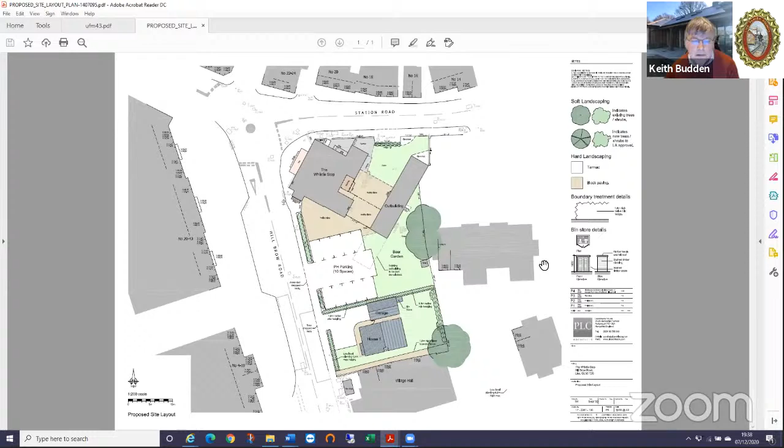Okay, so this is the proposal, which is to build a new house with an external garage on the Village Hall side of the existing car park. As I think everyone present knows, but just in case you don't, originally we had an issue with this because the application site was right up to the boundary with the Village Hall, which would have given us an issue with the fire escape from the rear of the Village Hall.

I would like to commend the applicants for responding very quickly to our request on that. They've moved the site over slightly to allow a path, which Liz is indicating now, for the fire exit to still go down. Now, obviously that will mean sacrificing the border that's there at the moment, because people can't currently walk down that bit of land. But at least it means that we will be able to maintain the fire exit. As I said, I'd like to thank the developers for responding very quickly on that request.

The only other comment I'd like to make at this stage is I do have a concern about the fact that the entrance to the driveway of the proposed property comes out within the boundary of the existing bus stop markings on the road on Hill Brow Road. I don't believe that's a significant issue, but it is an issue, particularly around the time when, not the public buses since they're now only once every two hours, but the buses that pick up and drop off from school from Bohunt, I think might be an issue.

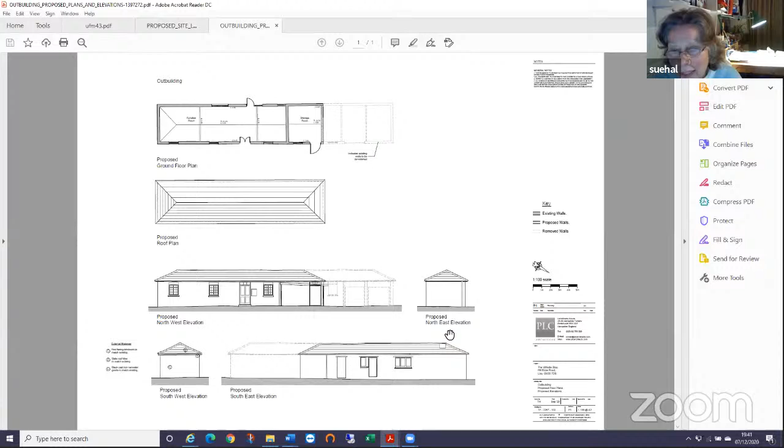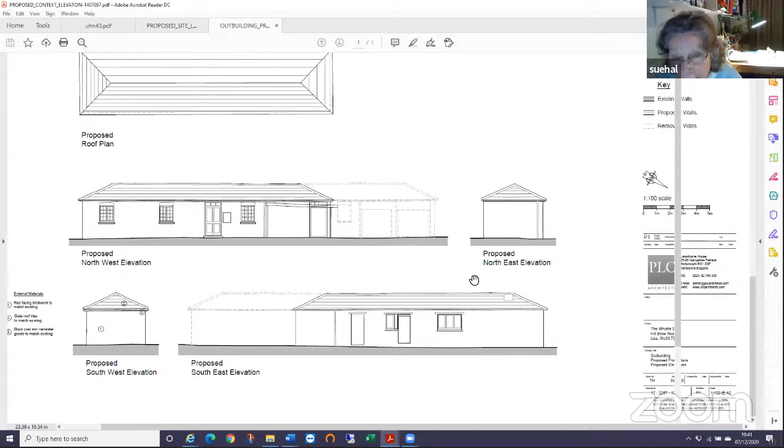Our village design statement, the local development plan policy 9, and the National Parks Policy SD5 all call for high quality design which respects and enhances the character and local distinctiveness of the conservation area and does not harm it. So I disagree with the applicant who claims that his proposal does that.

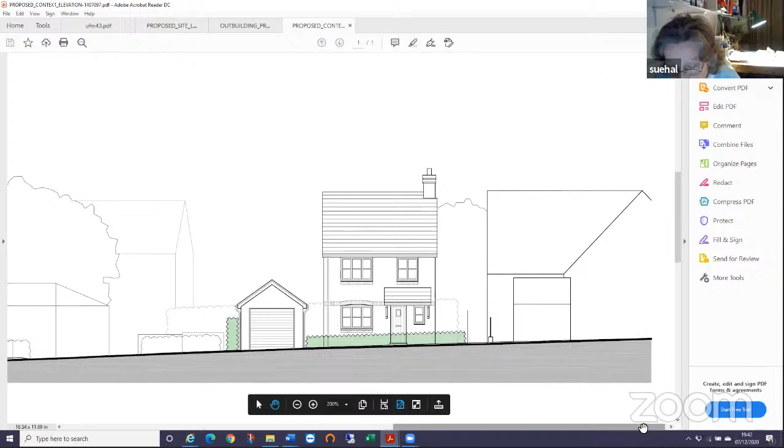The gable and windows on the side of the village hall facing the car park are a particularly characterful element of the village hall, and they will be largely hidden by this new house. It seems to me that it might also result in a considerable loss of light for the village hall.

A distinctive feature of existing small homes within the conservation area are attractive gabled porches and detailed gables to the roofline. That's completely absent from this proposal.

Materials will be critical, and I'm pleased that a slate roof is proposed, but I'm less sure about the red brick finish. Again, most of the existing smaller homes in the conservation area and the pub itself are rendered.

I have noted the revision you pointed out about the fire exit down the side of the village hall. However, I still have some misgivings given that the exit runs down alongside the village hall by the kitchen wall and window, which seems to me to be a likely starting point for a fire. I wonder whether this route has had the approval of the fire safety officer and whether there is a viable assembly point.

Parking, I really believe, is a critical issue. I'm not convinced that the retaining 10 spaces will be sufficient for the pub, not least because this pub is particularly favoured by builders and workmen at the end of their working day, and is a popular meeting spot with these people who tend to have rather large white vans which overspill standard car parking sizes.

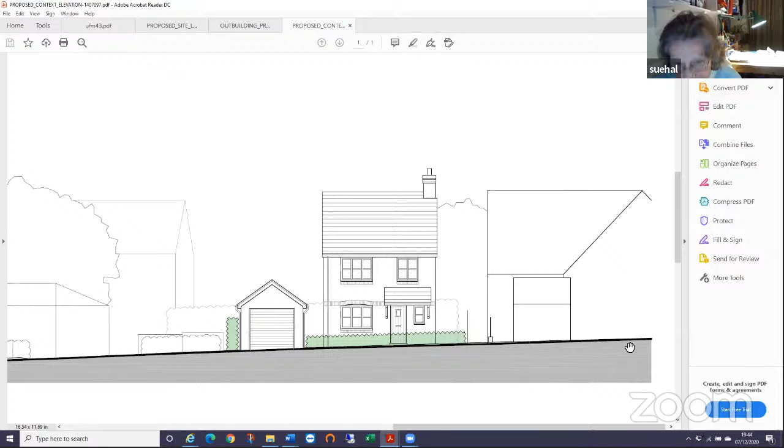I note from the deputations we've received from the applicant that he does seem to accept there may be a need for more parking spaces. The transport study he produced has identified in blue on the plan local streets without parking restrictions. Many of these identified streets serve terraced houses which already struggle to provide sufficient on-street parking to meet the needs of their own residents.

An alternative suggestion made by the applicant is the car park behind Tesco's. The applicant may not be aware that this is not a publicly operated car park. It is in fact a private car park owned and managed for the 45 flats and 6 shops in the block. It could be closed at any time.

The LNDP policy 15 makes this point very clearly and states that additional car parking to serve the village centre should be encouraged. You mentioned yourself the access to the property across the bus stop, where parking is not permitted.

On-site parking is proposed as a garage with a further parking space in front of the house. This sort of configuration is not supported by the emerging national park parking strategy, and our village design statement states that all future developments should have reasonable access to off-road parking.

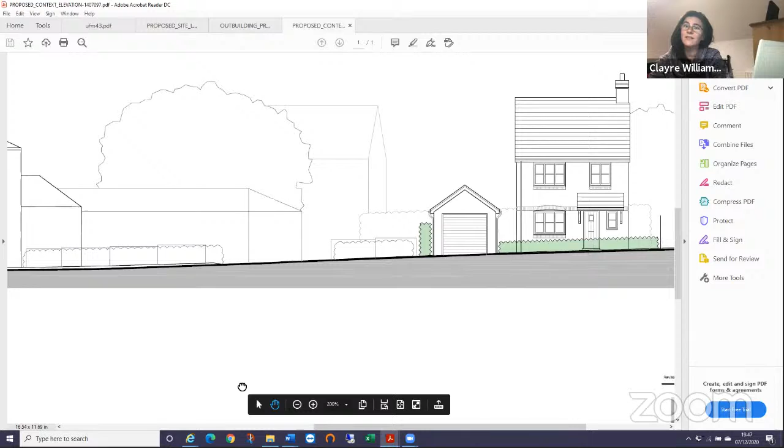The only thing I have to add is that the noise impact survey was done in October this year, which is not a good reflection of how noisy the pub is at night. Yeah, I take your point because of lockdown and curfew and everything else. Yeah, and it is very, very, very noisy.

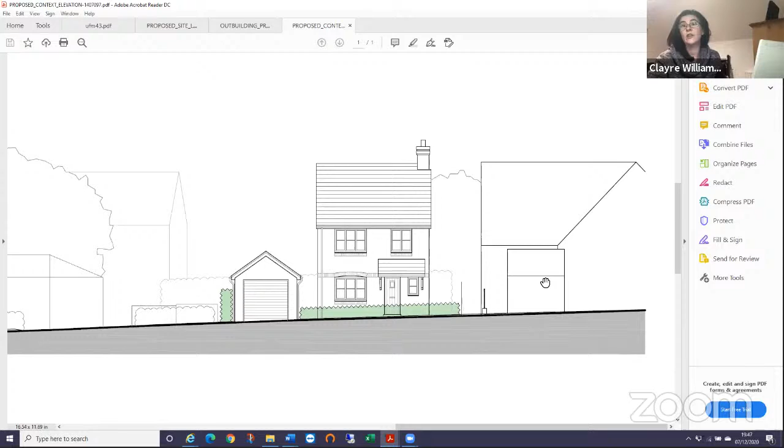Sheila: Well, I've got quite a lot to add to that too. I looked at the parking survey, which was taken up presumably to justify the reduction of car parking spaces, backed up by a totally unrealistic photo of the junction. I've never ever seen it so bare of traffic.

One of the reasons people don't use the pub car park, why it's fairly empty at times, is the difficulty of exiting it, a problem the residents of the new development would face. There have already been several near misses there, one bad accident I know of. It's due to it being a busy roundabout.

Constant traffic from Hill Brow Road, exacerbated when traffic's held up by the delivery lorries, the brewery lorries, and from Station Road, especially after traffic's been held up for up to 10 minutes at the level crossing. There's often a tailback from the hill brow end when the level crossing's down. People park on the double yellow lines. Okay, they shouldn't, but they do, so visibility is reduced.

And I've also got the bus stop. But I notice in the section on highway-related issues with access, they've actually admitted that, quote, there will be short delays for residents seeking to enter or exit, unquote. So it looks as though they've already realised that themselves. Mention of a vehicle crossover, I'm not sure what that is.

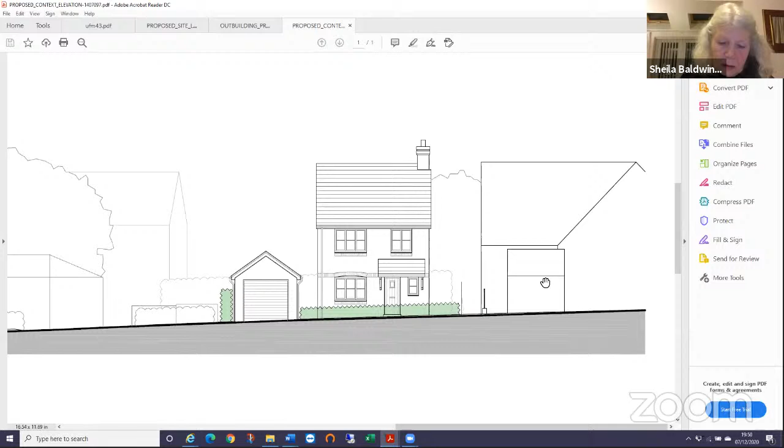And I wasn't sure about the outbuilding because it says one is being partially demolished, but from that drawing Lizzie put up just now, there seems to be quite a substantial outbuilding in the plan, so I'm not sure if that's part of the...

Just to clarify on that, Sheila, it's being shortened. Where Lizzie's got the mouse now, the hatched part there, is the end part which the publican currently uses as a double garage. It's that bit which is being demolished. The bit that I think is the skittle hall will still be there.

And then the last thing, I'm not quite sure about, it talked about 4 trees and hedges going. Well, that doesn't quite tally with the idea that they want to sustain the landscape. Anyway, that's what I wrote down. Okay, brilliant. Thank you, Sheila.

Howard: Yes, basically I agree with Sue and the other comments that people have made. I would just expand a couple of those comments. There was a claim that what was described as on-street parking had a maximum occupation of 44%, leaving 100 spaces, which means they'd identified a minimum of 178 total spaces.

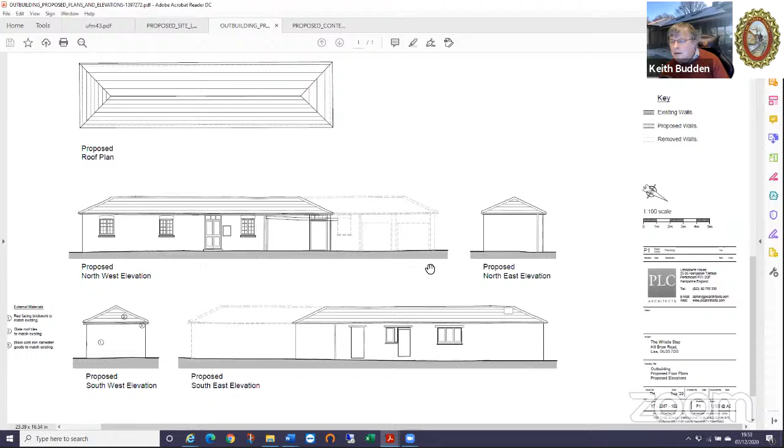Okay, thank you. And finally, Nick. Apologies, I couldn't find my unmute because of the thing on the screen.

Keith, just to say, my first point is I too appreciate the applicants being prepared to provide us with the fire escape path along the village hall, but also for a reason which is rather current, which is that we need to do some quite substantial refurbishment of the village hall, which I was looking at this morning. We'll need, amongst other things, to erect scaffolding on that side of the village hall. So having some space that isn't somebody else's garden, I think will be useful from that point of view as well.

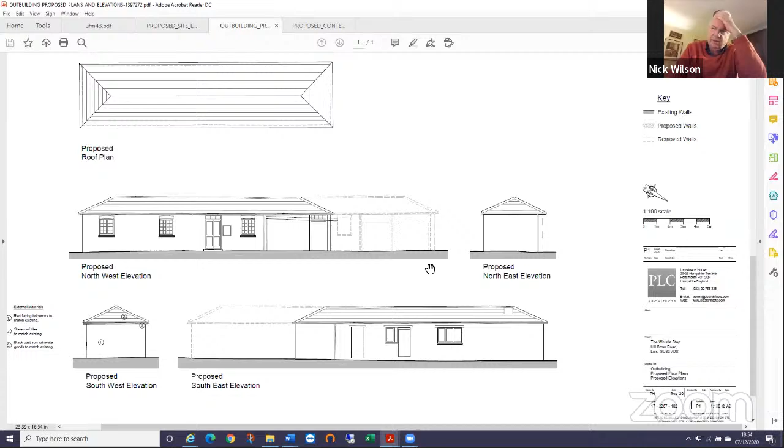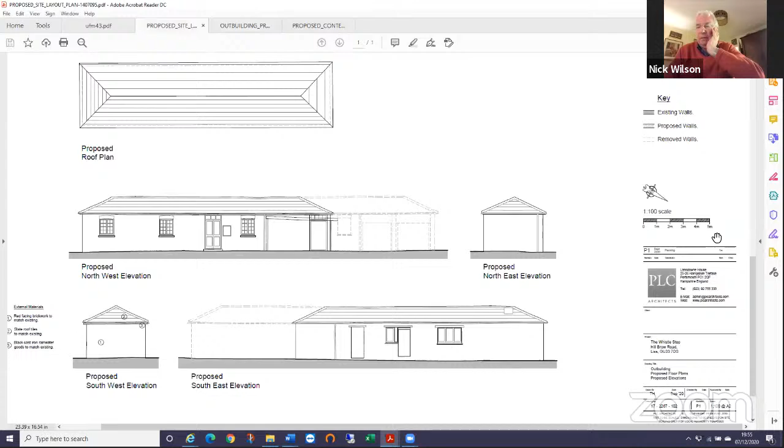I suppose my feeling about it was rather more positive than other members of the committee, in that I think that car park is a sort of rather unattractive and underutilized asset in the village. I would quite like to have seen something put there which would enhance the look of the village centre. I bow to Sue in terms of whether this particular design adds much - it doesn't, on the face of it, from the drawings that I've seen. And I think it would be quite difficult to make this rather small plot into something more exciting.

But I think I would say that I'm more favourably disposed towards doing something on that plot than doing nothing. Having said that, it seems to me, as I understand it, there would be 2 parking spaces for the house, one of which would be the garage. My suspicion is that the garage would actually be used for other things, in which case there would be 1 parking space, and the chances are that we would be adding yet another car to the people trying to find parking spaces. So to me, the parking provision for the house itself is inadequate.

As far as the pub parking goes, I may have got this wrong, but it looked to me as though the beer garden was going to expand in size as compared with the present layout. And I wondered, if there is a problem with parking, the pub might have to be prepared to consider expanding the parking space at the cost of some of the beer garden. I also wondered whether the parking spaces look rather tight, and whether they are adequate for modern cars, given the issue of width that's been featuring in the national papers recently.

So, as I say, I'm not as hostile as others may have sounded, but I'm not sure that this is the right proposal.

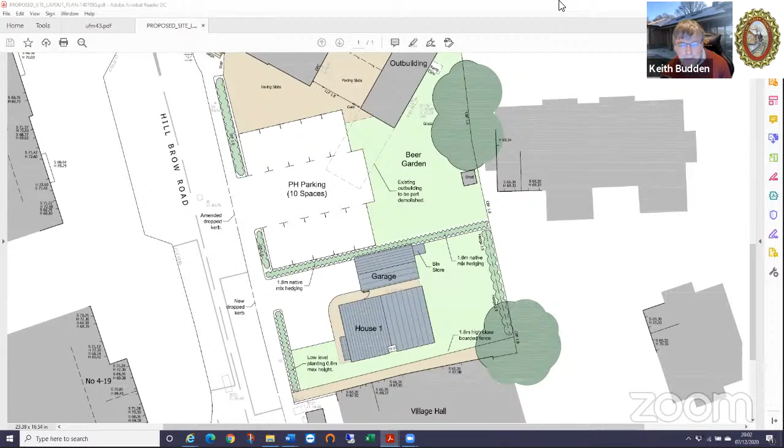I think it's also significant that they've admitted themselves that there might be, quote, short delays for residents seeking to enter or exit. The fact that they themselves have recognised it's not going to be easy to exit onto Hill Brow Road.

Having said that, if I may follow that up, my observation is that the use of that car park by Tesco shoppers is that people whiz in and whiz out, and actually this might lead to a reduction in the number of vehicles exiting from that side of the road. So I don't think we should overplay that point.

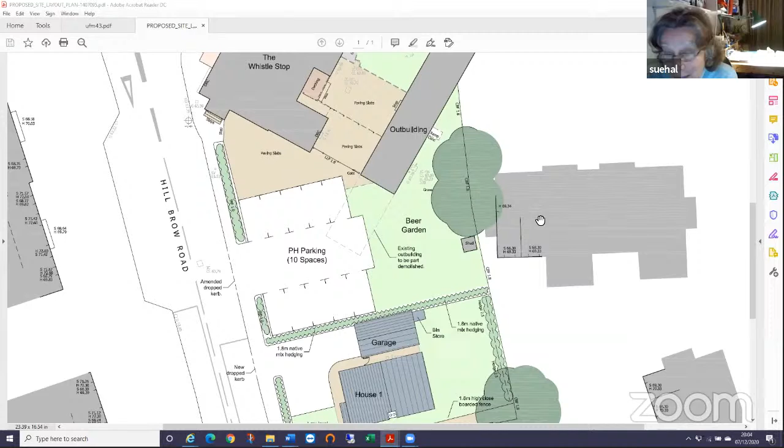Okay, but it will add to the pressure on Tesco's own car park on the other side of the road, which I think we should question in our objection - the total ability or sensibility of parking elsewhere. We ain't got it. It's not feasible.

No, particularly I think places like Shotterfield Terrace, where you look and see where all those blue marks are, when they say there's parking, it's just not on. And I'd accept that further up the road you've got the main Hill Brow Road car park, but we know from experience that people just do not park there and walk down to Tesco's. That's a whole different issue we could spend all evening on, but they don't, and so that's also there I think.

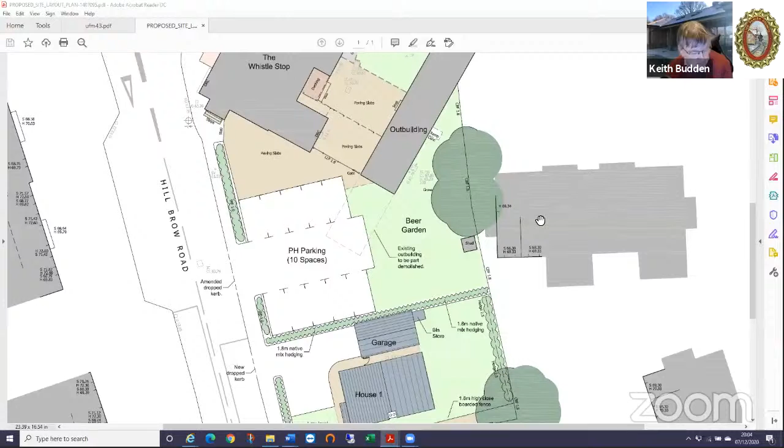Okay, I think we've got enough on that one. So if we can move then to 15 Old Stall Road.

Shouldn't we have a vote on this, Chairman? I think we should have a vote. Okay, we can have a vote. If I thought it was pretty obvious which way we were going, but yeah, I'm happy to have a vote.

Can I make one further point before we do that? I hadn't thought of it before, but somebody mentioned it: the fire exit going down the side is actually extremely dangerous if the fire is in the hall, because as people evacuate and go under the windows, the fire could blow the windows out. Yes, that's true. There's an easy way around that, to have the fire escape going along the bottom of the garden. I agree, that's a good point, Howard.

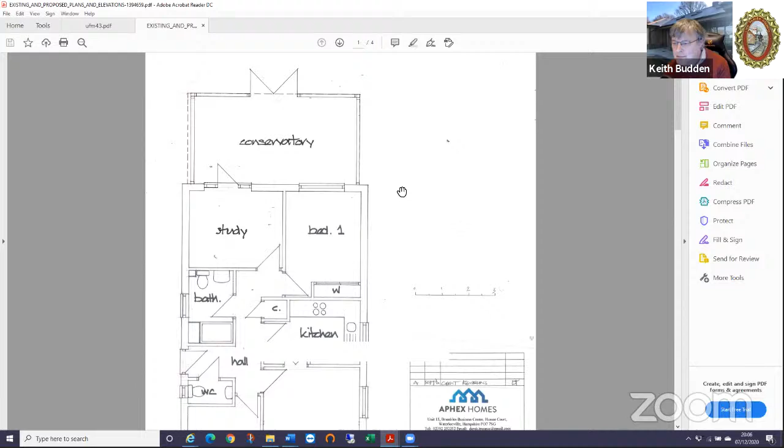Thank you. Okay, so I'm going to put this to the vote then. Can I have a show of hands in favour of those who support the idea that we should strongly object to this application? I think that's everyone. Yeah, that's unanimous. So thank you.

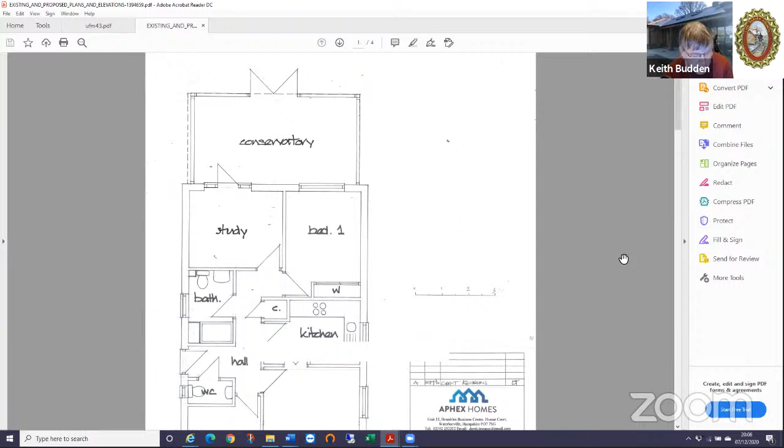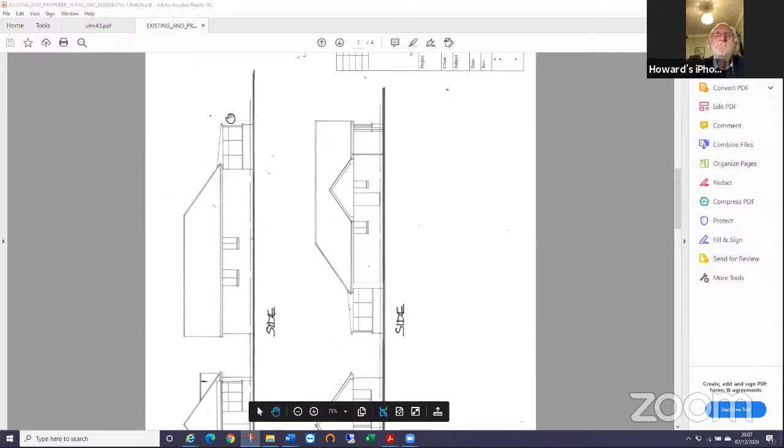Okay, so we move on to 15 Old Stall Road, which is a single-storey rear extension following the removal of the existing conservatory. So there's the existing plan with the conservatory on the back, and the new plan shows the replacement extension. Now, on the face of it, the area with the extension doesn't look any different, but it's the height which is causing the issue, because at the moment the conservatory height is just over 6 feet, I would guess, having had a quick look at it from the roadside.

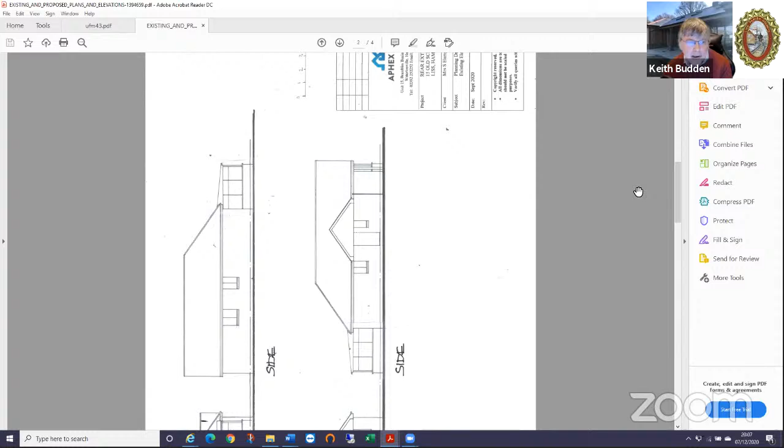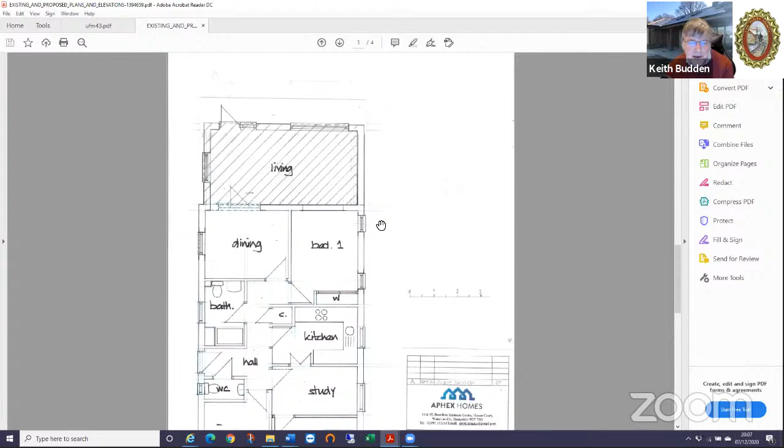And the new extension will be higher. Can you bring up the other drawing, Lizzie? Oh, it should both be on that drawing somewhere. Sorry, that was me. Oh yeah, there's another one. All right, okay. So that's the new extension, which in horizontal distance is about the same, but this plan will extend the existing main roof height out as far as the end of the new extension, albeit with a hipped roof rather than the gable as it is at the other end.

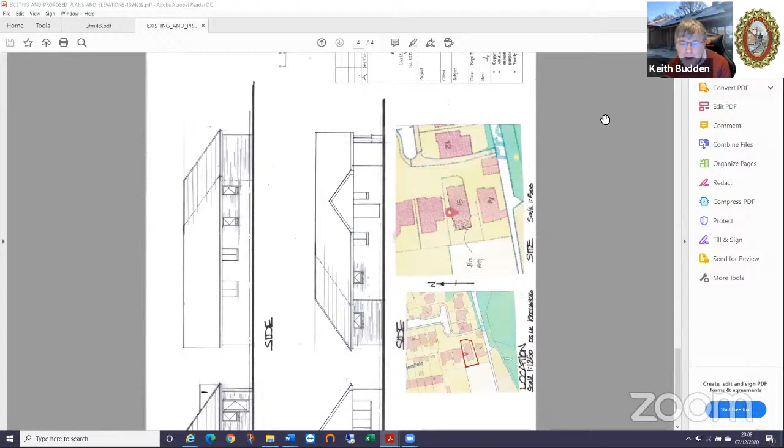And that potentially does give some concern. One of the things I would say is that, as a general rule, we have within our planning policies that extensions should appear lower, clearly identifiable from the main property, whereas here they've carried on at the same height of the roof. So personally I'd like to see the roof lowered a little bit anyway. But even if we do that, the roof's going to be higher over the extension than it is currently, which potentially gives an issue to the neighbouring properties.

So any thoughts? I'll go to Howard first on this one. Howard, any thoughts? I agree with the comments you've made. I haven't been able to go and look at it, but I agree completely with your comments.

Okay, thank you. Nick? The height was the issue that I'd focused on. I did wonder whether a flat roof in this situation would be preferable, although I'm not keen on flat roofs. There was the issue raised in the deputation about the windows at the side. But there are windows already on the side, in the main house, and I'm assuming as it's a conservatory there at the moment, that's glass as well. So I wasn't, to be honest, very persuaded by that objection. No, but I do have sympathy about the issue of the height.

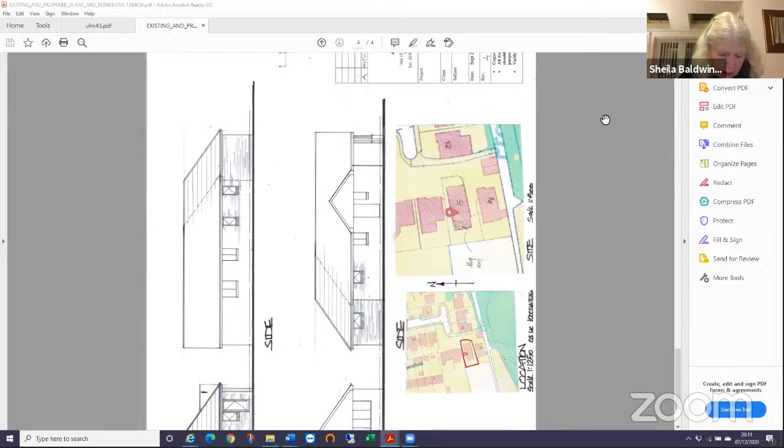Sheila. Well, I put down originally, because I looked at it before the neighbours contacted us, that I see no objection, but there's nothing about the impact on neighbouring property. And then, of course, we got the objection by the neighbours. I haven't been round there either, so I can't see it. I also put down, if the new build's roof is no higher than the existing conservatory, I see no problem. But you're saying that actually it's going to be higher? Yes, because the existing conservatory roof is literally just at the top of the conservatory, so it's probably 6 to 7 feet off the ground to the apex, whereas this is up at the height of the main bungalow.

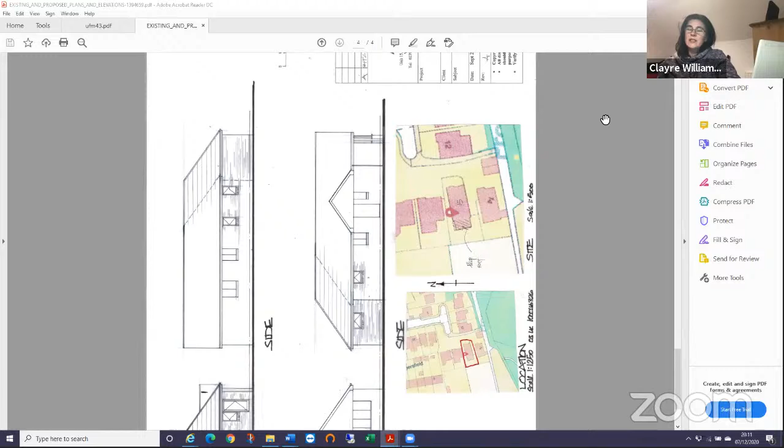I have that we would welcome a solid roof over a glass roof for the dark skies thing. Yeah, but agree that it's possibly too high, and if it could be lowered, that would be great. And Don? No, I've got nothing to add. Okay, thank you.

I think we're going again, I think this one we might need to put to the vote actually, because I'm unsure whether we feel strongly enough about it to object or not. So can I first of all get that established, because then I can think of the wording we can use. Can I have a show of hands of those who have no objection to this, so they're happy for it to go ahead?

Just Sheila. Okay. No, I think there should be a consideration. I think we need to say that we do have worries about the height, etc. And maybe they'll come back and say, right, we're going to lower it. Okay, yeah.

So can I say then that as a committee, our view is that we object to this application on the grounds that the roof line is not subservient to the main building, which is against policy. Although we welcome the solid roof rather than the conservatory, as that will contribute to the South Downs Dark Night Skies initiative. And so we would, if the officers are minded to go ahead, we would like to see the ridge height lowered, if at all possible. Is that a fair summary?

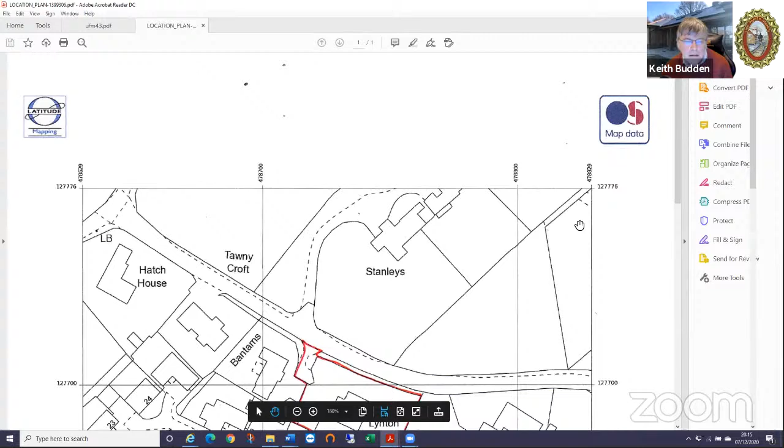Lynton is the property opposite Stanley's. As you go up Hatch Lane out of the village. It's a bungalow property, I think, from memory.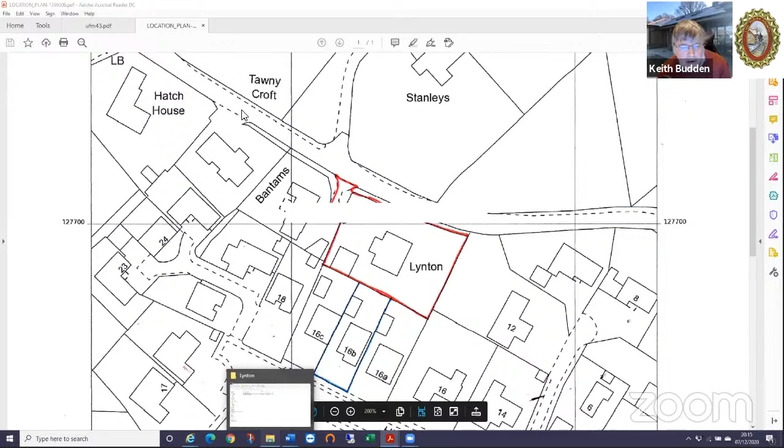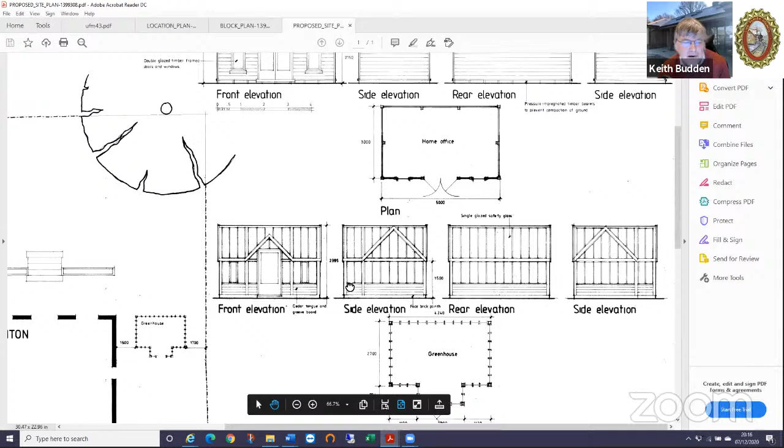Yes. And if we can go to the other drawing, Lizzie. That one. So the proposal is to put a home office right down the end of the garden, effectively hidden under the tree, a greenhouse, and a shed next to the property. And the applicant says that none of these will be visible from Hatch Lane itself because of the boundary treatment, and I suspect that's probably true, because the boundary treatment is quite dense there.

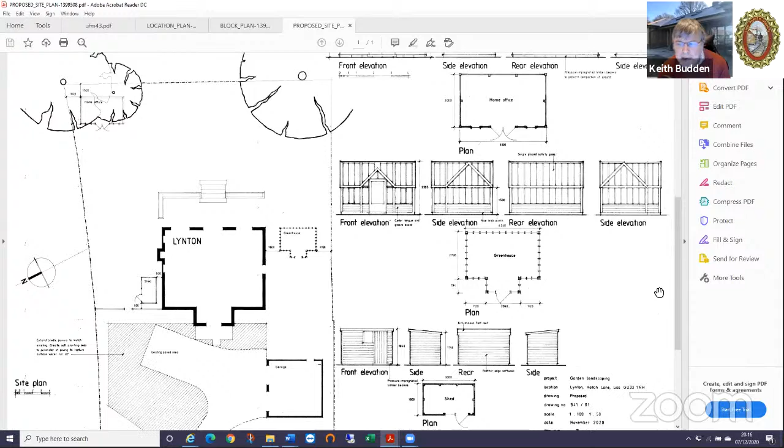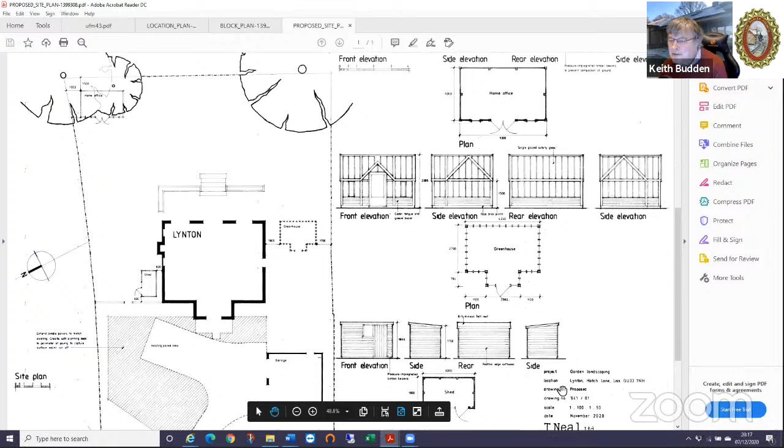Anything they want to say on this one? I'm not sure how these bits might contribute to the 30%. No, that's very true. I think from just looking at it, I think it's probably okay, but I agree we need the officers to check that it's within the 30%. Anyone else, anything they want to say on this one? No. So I think then we're going to say no objection, subject to the officers confirming that it fits within the 30% policy for expanding the amount of space. Everyone happy with that? Mhm.

Okay, good. So then we move on to Longbarrow Barn, Farnham Road, and this is really a legal issue, which is a lawful development certificate for existing use, land of residential use as a garden, which is just the pocket of land indicated in red on the plan. The blue indicates the rest of the land that's in the ownership of the property.

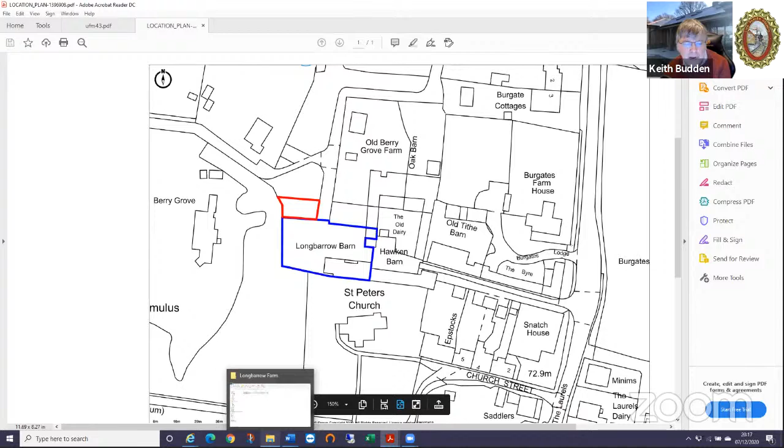As I say, it's really a legal decision on whether it is lawful development or not. But my personal view from the evidence that was provided, and particularly photographs, would seem to show that it's been in use as a residential garden for quite some time. And so unless anyone has anything to raise, I think our view on this is going to be no objection. I concur. Everyone happy? Just with no objection on that one?

Thank you. So we then move on to 1 Rushfield Road, which is a single-storey extension to the side.

What would you like to look at, Chair? Good question. I think, can we look at the... sorry. Yeah, it's the side, isn't it? Play dodge the words here. Every time I think, oh, that's the one I want, then it moves. Can we look at the site plan, please, Lizzie? Sorry, just to make it really confusing for you. Site plan, the one right at the end, bottom right. Yeah, okay.

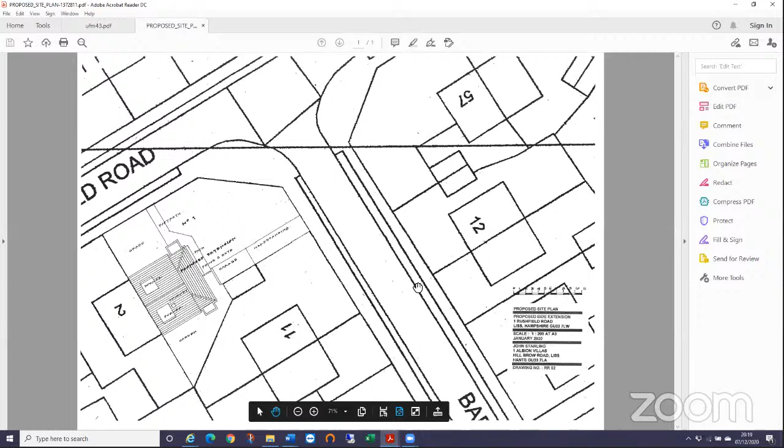So this is the proposed extension onto the side. It's a corner plot for the property, and the roof there is only a single-story extension, and the roof is subservient. It comes under the first floor windows on the property. There's plenty of space beside it, and other properties in Rushfield Road have had extensions in the past, so it's not setting a precedent in terms of the street scene.

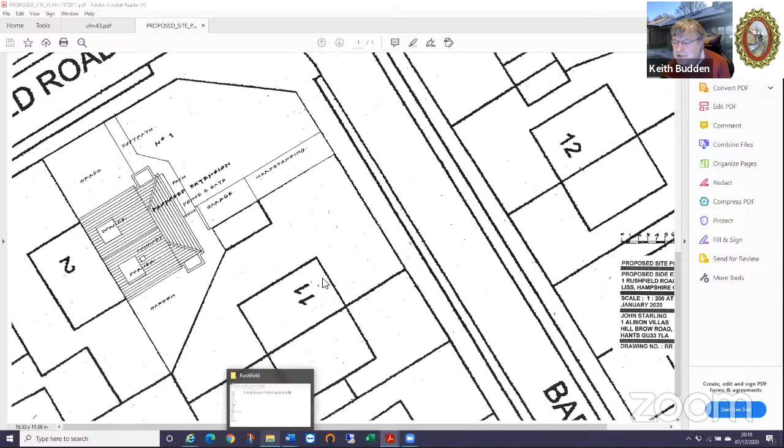Anybody got any comments on this one? Sue? No? Anyone got anything? Otherwise we'll just do no objection. Right, is everyone happy to agree no objection on this one? Yeah, okay, thank you.

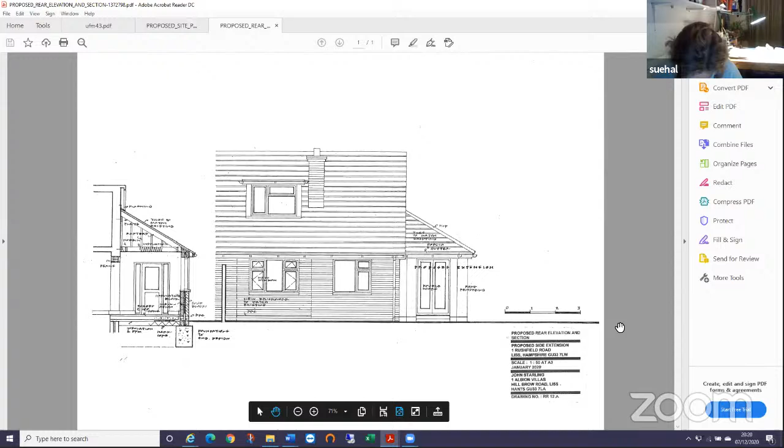So we then move on to Cumbers Studio, 31 Andrews Road, which sees an increase to part of the roof height, a single-story extension to the side and rear, and a change of use of part of the site from public community land to private garden.

Is this the one we looked at quite recently? It is, yeah. At the time our only concern was ensuring the change of usage with the garage, and I don't think anything has changed really from our perspective. The only reason the application has changed is that they've now got this area of grass and garden which they've gained from Carla. Originally this pocket of land was public community land as a buffer between the development and the property, but they've now negotiated with Carla to have that parcel transferred into the ownership of Cumbers Studio. Since we only wanted that land as a buffer between the development and Cumbers Studio, I personally am not going to get worked up about the ownership changing.

Has anybody got anything they want to say on this one? Otherwise, I think we just stick with our original comment.

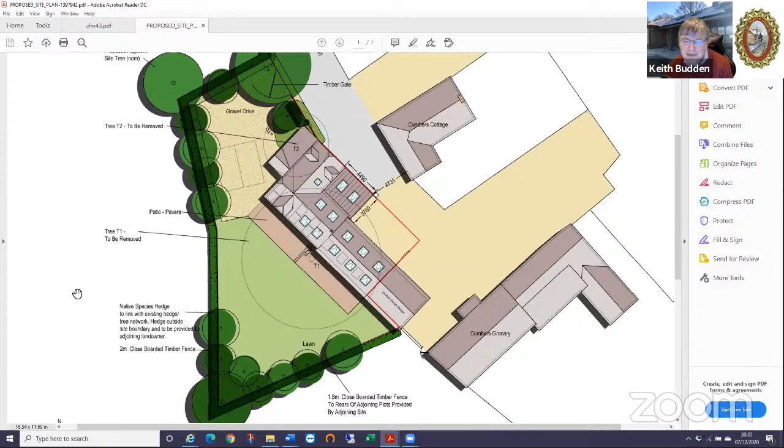By how much has the roof been heightened? That's a good question, I don't know off the top of my head, Sheila. Will that have an impact? I don't think it will, to be honest, it's reasonably insignificant. My only personal concern with the roof is the sheer number of roof lights the building now has. I think that reinforces our statement from last time about wanting them fitted with some blind or device so they become opaque at dusk, so the light doesn't project up into the sky, especially given we spent quite a bit of time with the development in Charter trying to make sure they wouldn't have any major streetlights projecting light into the sky.

Nick? Well, that was my one concern, I think we should take the opportunity to reinforce our view about that. But on the overall proposition, departing from any planning guidance I might be aware of, I just wrote down fair enough. If I had 70 houses plonked on my doorstep, I think this is the least I would like to be able to achieve, so I think it's probably a very fair proposition, personally. Yeah, okay, so other than the comments we made last time, I think we're going to stick with those comments.

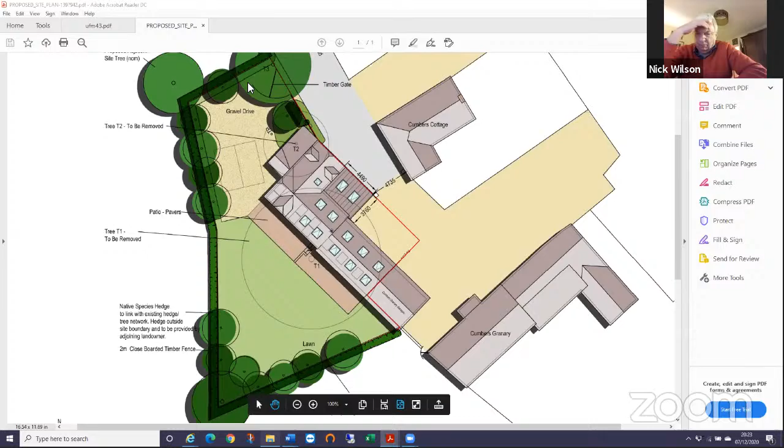Okay, so then we move on to Wheatham Farmhouse, Wheatham Lane in Liss, and this is for listed building consent for some external and internal alterations, including the installation of windows and doors of the existing attached garage, with proposed use as a residential annex.

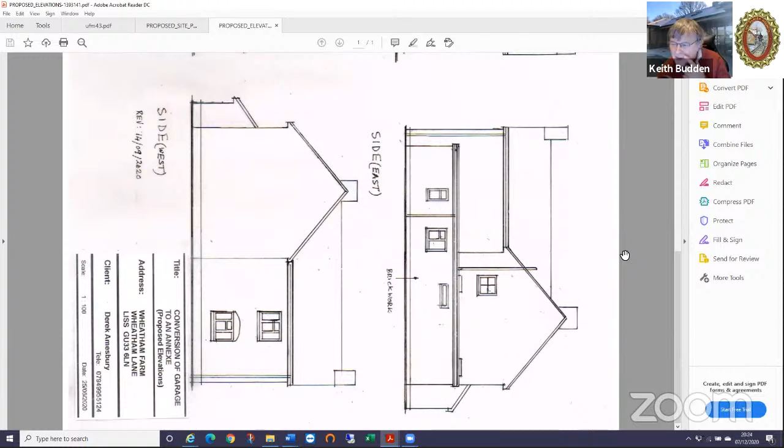Can you bring up the proposed elevations, please, Lizzie? Could I just raise a point for clarification, Keith? I read the heritage statement and it's not signed, it's not clear who wrote it. Can we assume it's the applicant who wrote it? I think we have to assume it's the applicant. Yeah, as you say, it is anonymous.

If you can scroll up a little bit, Lizzie, so we can see the front elevation. My personal view was that from an appearance point of view, this is a major improvement compared to the garage that was there. And they've obviously indicated the windows will be very similar to the windows in the existing property, which I think is important given that the building is listed.

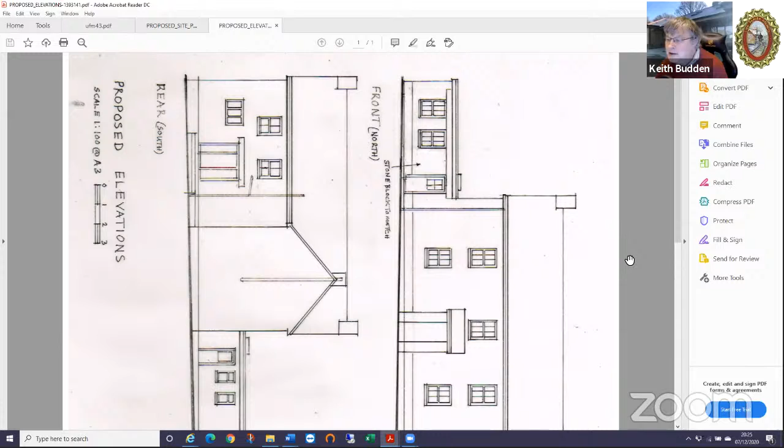I don't know what others think, but my view was that as long as there was still sufficient parking, I couldn't really see any objection on this.

Howard, anything you want to add? No, I'm fine with it.

Sheila? Well, I've got written down, would it exceed 30%, or does that not count if the 1960s annex was already there? Yes, it won't count, because it's not increasing the space, since the annex was already there. Well, in that case, no, I've got no objection.

Sue, any concerns? No, I didn't at all. Okay, providing it remains as an annex. Yes, okay, that's a good point.

So I think then no objection, providing there is still sufficient parking, which I'm fairly certain there is, and also a condition that that part of the building remains an annex and ancillary to the main building and doesn't become a separate dwelling. Do we need to say something about the roof lights?

Yes, we could put in a normal condition, Nick, on the roof light. Okay, so we also have to put something about the listed building conservation officer having to agree with it as well. Yes, I mean, they will anyway, but yes, that's a good point.

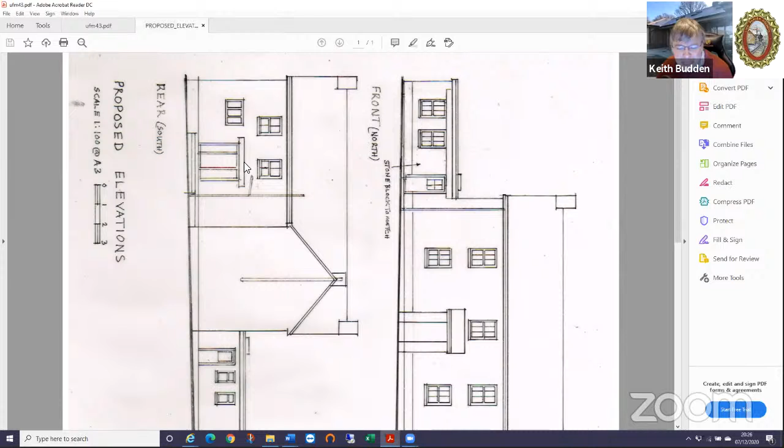Okay, that's good. So we now move on this time to Newfield Road. We had one in Newfield Road, which is the conversion of the roof space to habitable accommodation with roof lights to the front and a dormer to the rear.

It's an end of terrace house, one of the small terraces in Newfield Road. I don't know if you can bring up the proposed elevations please, Lizzie. That one, yeah.

So the proposal is for the front of the house to have just skylights, three roof lights in the roof, and then at the rear of the house to have this dormer.

I've got to confess I've not had time to go around to Newfield Road to have a look at this one.

Sue, are you aware whether any of the other houses like that have a dormer in Newfield Road? Not that I know of, and I have been round and had a look. You can't see too much at the back, at least I wasn't able to.

I do have concerns about this because Newfield Road is a strange mix of houses. Some are newer and others older, different shapes and sizes. But this terrace is one of the older terraces, and probably the most attractive terrace in the road. So I think this is a little disappointing, and I wonder what the impact is on the neighbours at the back.

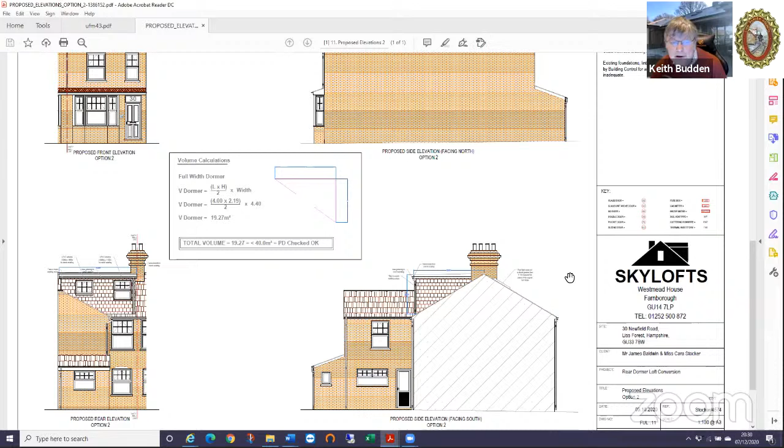It is the rear windows, I don't think the front windows are going to particularly - no, I mean the front windows are roof lights. They are what they are, but to me it's the bulk of this extension at the back. Again, if you look at the side view there, where it comes out by the chimney, it's not a small dormer. It's effectively all that side of the property.

Claire, anything? Nothing more to add than what's already been said. And Nick?

I think again there was a Velux window or windows involved. We ought to add that as well, in terms of if it was, let's go ahead.

Okay, so unless anyone's going to contradict me, I'm going to say strong objection on grounds of overdevelopment. We have concerns about the effect of the windows at the rear on the amenity of the neighbours, about the sheer bulk of the rear dormer, and about the implication that may have on parking, because if it forces additional parking, that presents a problem in Newfield Road.

If the officer is minded to give permission, then we would ask for the normal dark skies condition to be added to the roof light.

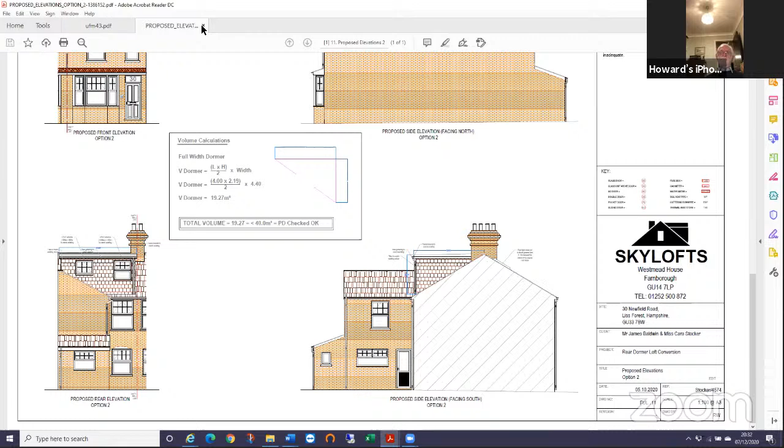Okay, so we move on then to Brickfield, Hawkley Road, and this is another lawful development certificate for use as a residential garden. I must admit, lawful development for residential garden feels a bit like London buses - you don't get any for years and two come along at once. But to my mind, it's quite clear that this has been a garden for quite some time.

I noticed that Hawkley Parish Council on this one have also commented, and they don't have any objection. Unless anybody's going to come up with a real striking reason, I can't see any reason we should object to this. No, I agree. Okay, agree.

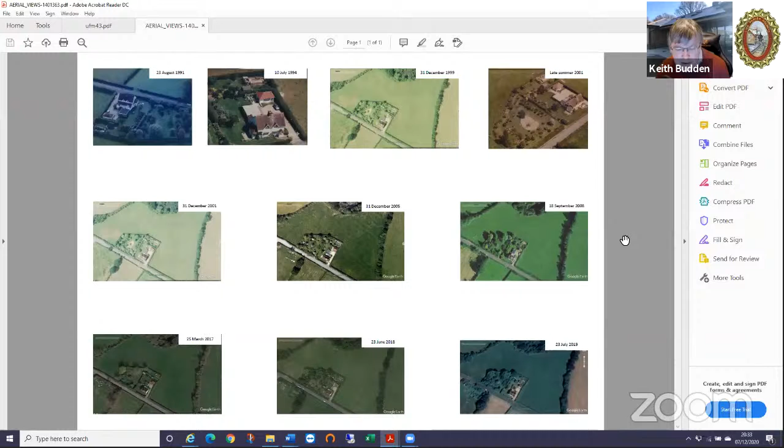Okay, so then we come on to the Triangle Community Centre. This is an extension of planning permission for something that they've already had permission for, which is for 2 glazed canopies, one to the front and one to the side of the building.

My personal view is that, given that they've had permission for it and nothing really has changed in the intervening 3 years, I can't see any real reason to object to extending the permission. No, I just agree. I agree, absolutely. Okay, so we go with no objection on that one.

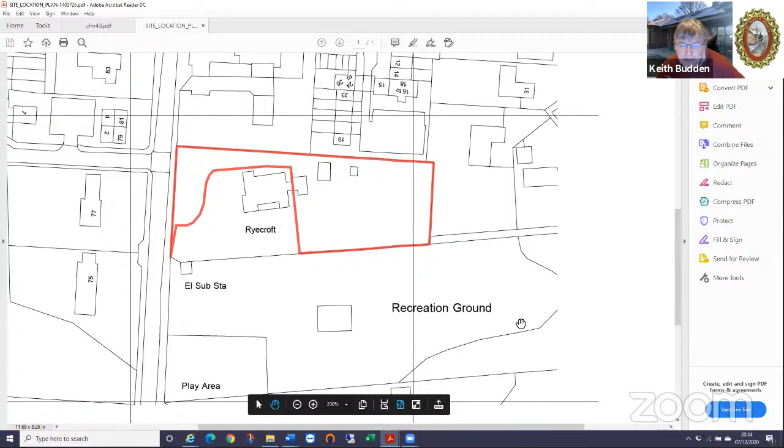And so then we come to Ryecroft, the Annex at 76 Forest Road, which is a proposal for 3 dwellings following the demolition of the annex. If I can just give a little bit of background on this one, as members will remember, we saw this one a few months ago when they actually wanted it to be 4 dwellings.

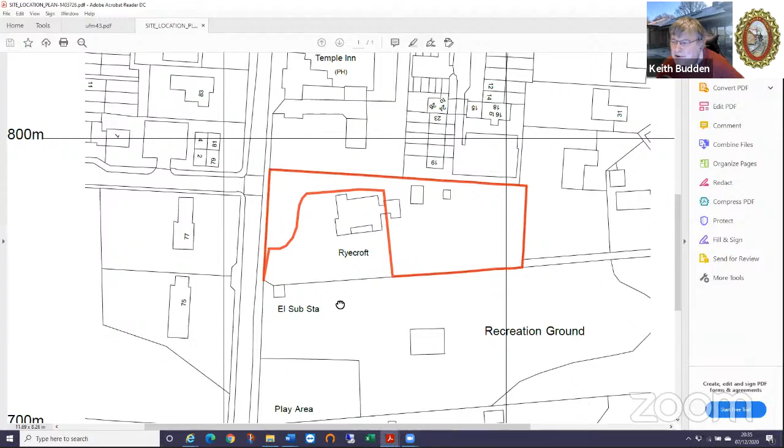We objected to that and said that we would rather it was 3. So in that sense, I guess it's good that the developer appears to have listened. There was also a question about whether the annex was its own separate building, and the officers have now awarded that with a lawful development certificate, so they've accepted that it is a separate dwelling. So this is actually going up from - although it appears to be going from 1 to 4 - it's actually going from 2 to 4.

Anyone, any comments? I'll go to Sheila first on this one, I think. Well, I just feel we've been here before, and in the interim they then wanted to ask to attach the annex to the main house and what have you, and now they've gone back to the extra houses in the garden. I noticed someone wrote 'I'm unable to locate the proposed 8 spaces adjacent to the properties' - is that the number of car spaces? Yeah, and presumably it was some official who wrote that.

One of the reasons we objected before was that they would be so visible from the Rec. Yes, and they still will be. I mean, there's one tree at the bottom of house 2, and that seems to be... I just feel they're sort of wasting our time. They keep coming back to us.

I'm also a bit worried about the access, which is on the brow of a hill opposite Newfield Road. So it's not the best place to have cars leaving or entering. And in one of the drawings, the vehicle access drawing, there's a mention of a private drive to 5 dwellings - is that something they've left in that they should have taken out? I think it probably is.

But I just think it's access which is in quite a dangerous place, especially given the speed some traffic goes through the village, and also the fact that they now will be very visible from the Rec and can look out over the Rec. Yes. Nick?

Well, as Sheila says, we have been here before. And last time we basically said we don't want 4, 3 would be all right. So to question the whole viability of the scheme would be a bit perverse, frankly. Having said that, I would want to be satisfied that there is adequate parking for each of the houses. I wondered whether, in an attempt to make as much money out of this as possible, the developers have tried to squeeze 2 4-bedroom houses and a 3 into space which would be more reasonable to be no more than 2 3-bedroom and 1 4. So my instinct is we should focus on the parking issue.

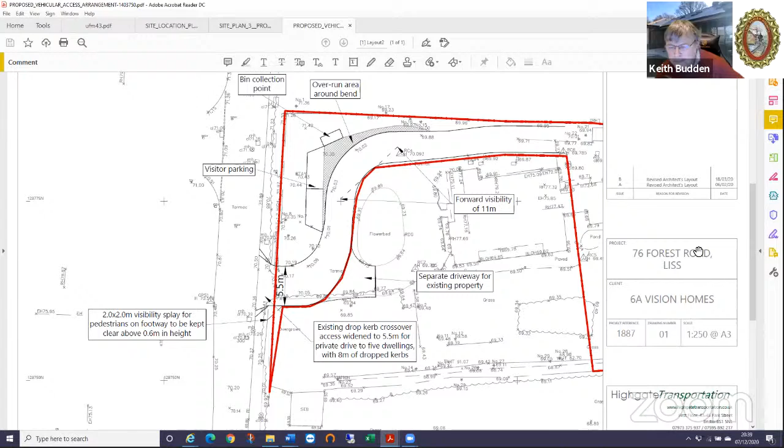But I would agree with Sheila about screening. Yes, I agree there. And I noted one of the neighbours on the right-hand side of the plan as we're looking at it is concerned about the fencing. I think we can make a general point about screening along the recreation ground. Having said that, I would apply that also to the main Ryecroft building, which has now had its garden decimated and is now completely bare of vegetation. So the rec is now going to be looking at potentially 4 buildings. Good point. Okay, Sue.

Yes, can we go back to the previous drawing that we saw, please? Not that one, that one. Yes, that one. I have huge difficulty in really convincing myself that all that works with the parking.

They show turning here and turning there and 2 spaces and half a space, and I think we need to make sure that the relevant officers are convinced that this can work. And yes, the visitor parking is up here on the corner, isn't it? On the corner, and people, delivery lorries, we all know at the moment the number of delivery lorries that are around, or vans, they'll all be coming in here. I just think it looks like a cramped development with potential real problems with parking.

And I support what everybody's saying about the boundary. I was horrified when I saw them cutting it all down the other day.

Okay, Don, any thoughts? Well, I haven't really got much to add again. I think it's truly horrible. I think there's far too many houses in there, but I do remember it was 4 that was proposed before, I think it was. And obviously the parking and access is a serious problem. But I'm afraid I can't see a planning ground to object other than pointing that out.

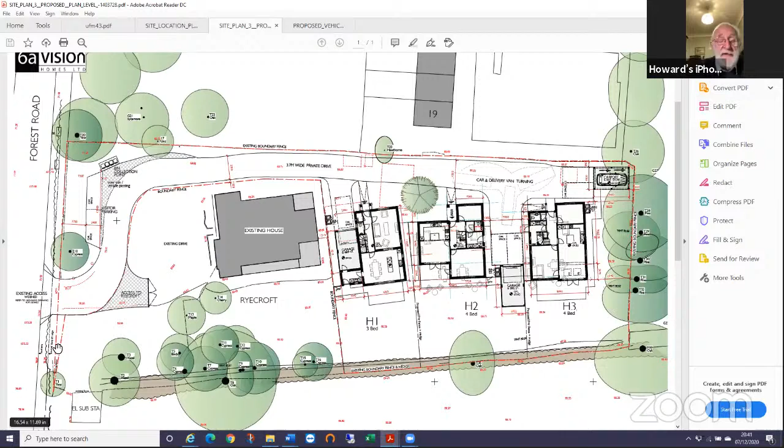Yeah, okay, Claire. I kind of disagree a little bit, actually. Part of our objection last time round was that we felt that 4 houses was too many. So they've reduced it to 3, but they've made them bigger. It's every bit as much house, just in fewer pieces. So I think our objection to overdevelopment still stands.

Yes, I'm minded to agree with you on that. I think what I'm picking up is that we object on the grounds that we believe that although there is the reduction from 4 properties to 3, which we asked for, given that the size of the properties has increased, we still believe it to be overdevelopment of the site.

We remain to be convinced about the parking arrangements, and so we would ask that that's thoroughly checked by the relevant officer, and that should the officer be minded to give permission, we would request very strongly that there should be consideration given to the boundary treatment to the existing properties at the rear, but more importantly, from our perspective, to the recreation ground, because it's not acceptable to totally decimate that boundary, because that boundary is important.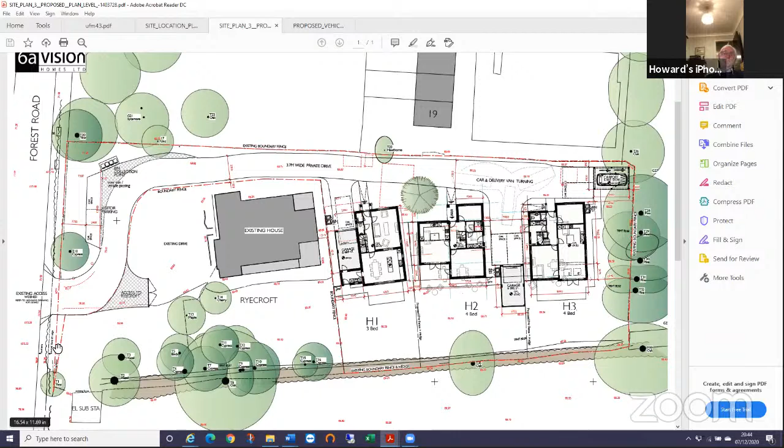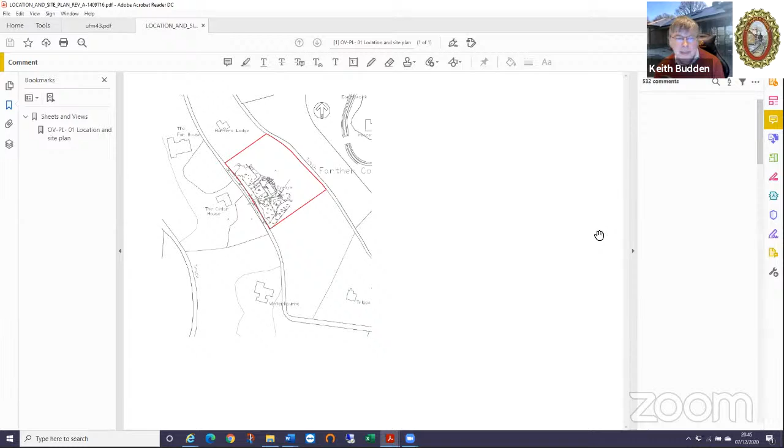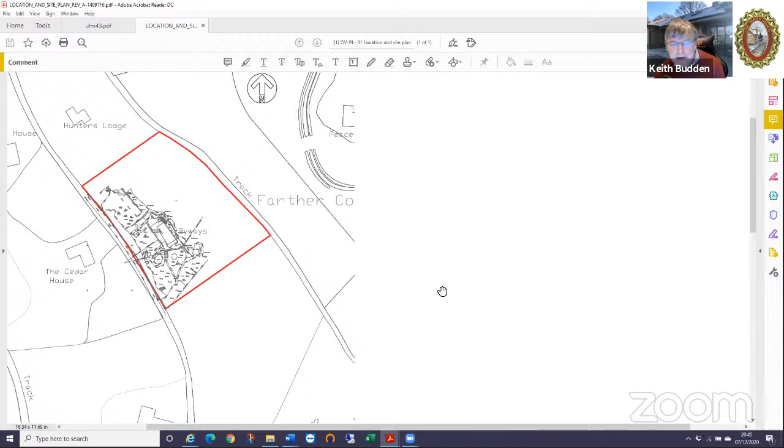Okay, thank you. And so we come to the final application. Well, in fact, the final but one, and I'll explain that in a moment. But the final application on the agenda is Byways Farther Common, which is to construct a new barn-style ancillary building to accommodate 2 new lockable garages, a workshop, storage, and home office. As everyone knows, Farther Common is a mix of very different properties. This property is near the upper part of Farther Common, and basically what they're saying is they want to build this new property for these ancillary purposes.

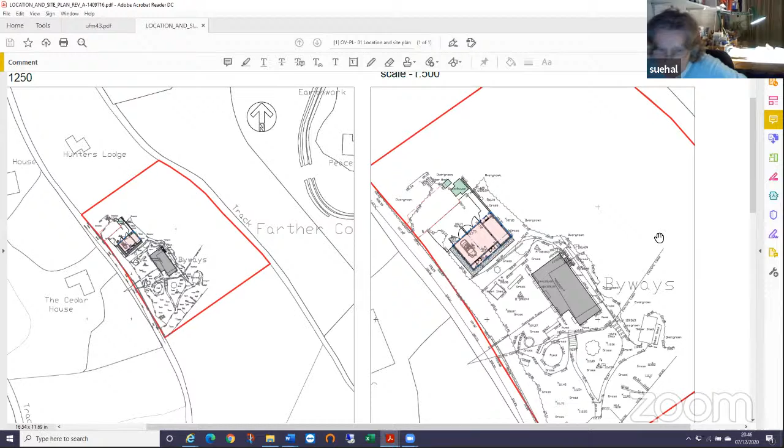The existing building is a bungalow, and my immediate reaction on looking at these plans was there's no way that's under 30%. Agree with you. That's my main comment. And my other comment is that we need a firm condition that the building intended for garaging, which looks like quite a substantial building separate from the house, that it should not be separated.

It has the looking of another house to me. Yes, I agree. Don, anything you want to add? No, thank you. Howard? No.

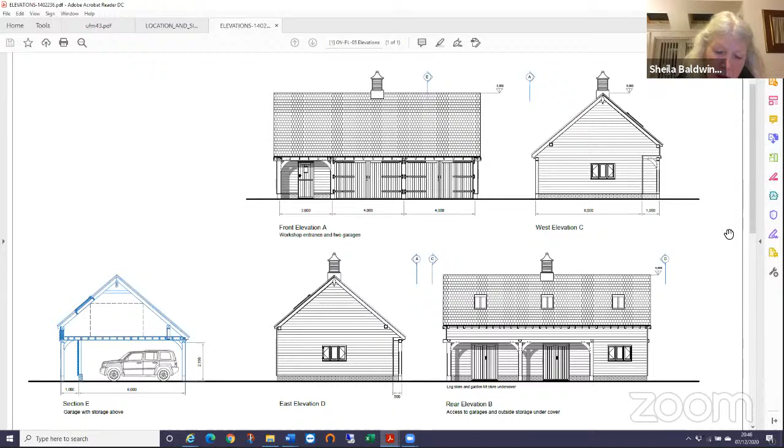Sheila? I just thought it seemed very high, two floors, which can be seen from the lane. And it seems the first floor seems very large just for a home office and storage. And like Sue, I wondered if it could become an extra bedroom. Yes, I think there's a danger of it becoming a whole extra property. That's the issue.

Claire. Nothing further from me. Okay, thanks. Nick. I had the same point about no extension of usage to residential. I think we might support the view that the roof, if it is to be built, should match the main house.

And I noted that in terms of the roof lights or the velux, they said it would be either tinted glass or blinds. We haven't talked about tinted glass before. Is tinted glass sufficient from our point of view? It really depends on the tinting, because there is now some glazing material available which is tinted, which actually turns opaque when it's dark. I've seen that applied to a property in Selborne, and it's very effective. So if that's what they're proposing, I'd be quite happy with that.

But the broader point is, I think we're going to say strong objection on the grounds that we believe it to be over the 30% extension in area. Therefore, it is contrary to the relevant policy in the South Downs local plan. If the officer is minded to give it permission, then we would request confirmation that roof lights will be sufficiently shielded at night, because it is definitely an area where dark skies is an issue.

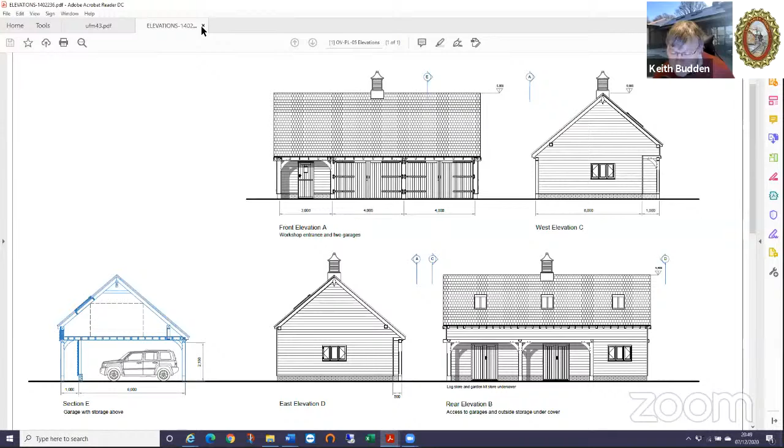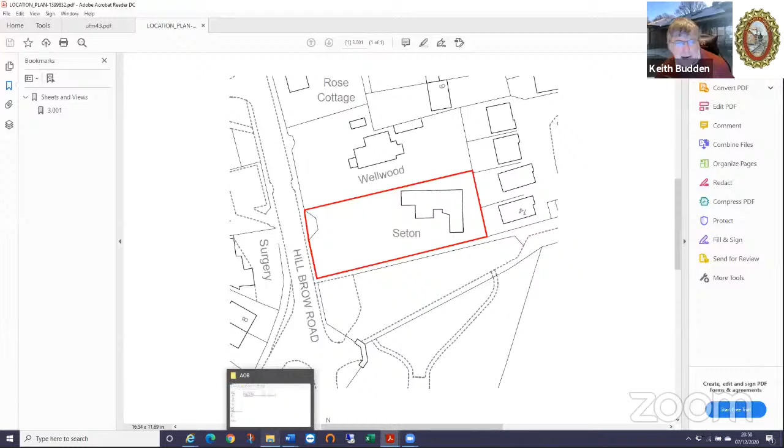The extra one is Seton, which is the site next to Newman Collard playing fields, where there are two new properties pretty well nearing completion now, or appear to be. The developers have now come forward and said, well, now I've got these two properties, I'd like to build two carports. I don't know if you can bring up probably the block plan. Yes.

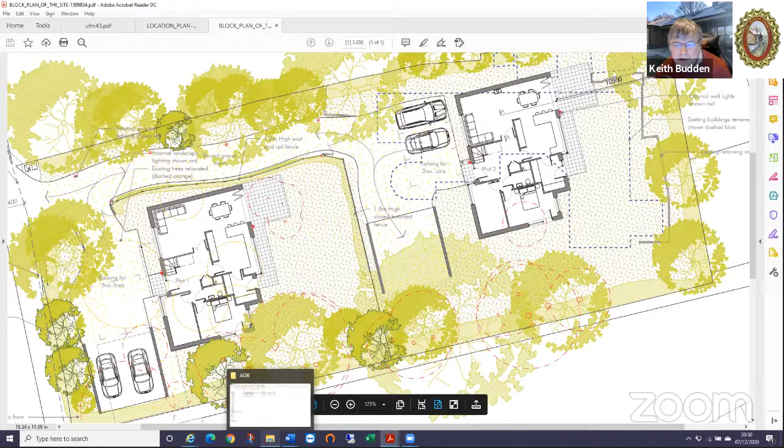So the proposal now is to build two carports onto the properties. One on the left-hand property, as we're looking at it, where the tiles are shown there, but on the other property it's again in a similar position, opposite there, where this is just indicating. They're going to be open-sided carports, so it's not a situation of building a garage, but obviously there will be a roof over the top.

What did they show before for car parking? Where was it to be? It was where the tiles are shown, but it was just that they would be parked there in the open. And now they're just proposing to build these carports over the top. Quite high. They are high, yeah.

I must say, I don't dislike the look of the properties, but they don't look as I remember them. No, I agree with you. And I didn't remember that they were both so different. I mean, they're similar, but the shape is not... that's right.

I'm sure they've been built according to the approved plan. But yes, I agree with you. I actually think the properties themselves are quite attractive, and they've fitted onto that site better than I thought they would from the actual drawing. I would agree with you.

If they're so high, will they intrude on the view from the road? No, I don't think they will. Well, they'll be visible, but given the new properties are quite substantial anyway, I don't think it's going to make a major difference. The only place they're really going to be visible from is the Newman Collard car park, because of their location on the site.

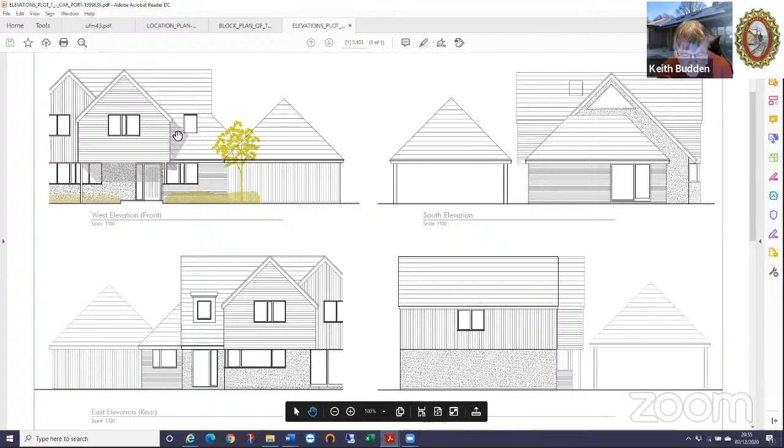Thank you. So we then move on to the applications that we've got approved: Sires Road, Willow Road, Millbrook Close, Rycroft - which is a lawful development certificate adjacent to 2 Cardew Road, which was the telegraph pole - Brickfields and Patrick Stocks Road. And refused was Eastfield Cottage, which had its lawful development certificate refused, so they now have to submit a full planning application if they want to go ahead with that change.

And the one I was very pleased to see refused was the telecommunications site at Wild Farm. That's the one that was missing last time, isn't it? Because I think that's a good result that it's been refused.

I think the Rycroft one is interesting because I hadn't noticed that before - they're saying effectively, by saying they have a certificate for the use of the annex as a separate standalone dwelling, it almost supports my view that it was overdevelopment to put three in.

Yeah, I mean basically they use it just... we can't go back to that. We've done it. No, but I mean, I say they use it to justify the additional dwellings effectively.

Then we move on. Sorry, Chair - did Lizzie also send round one about Westwood House, I think, earlier today? Am I right, Lizzie?